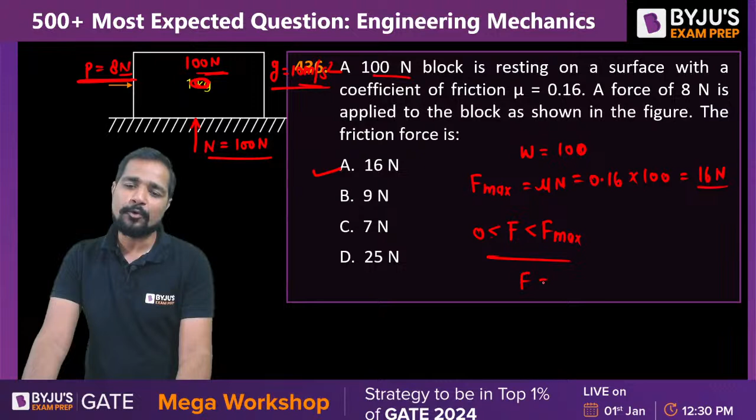That's why if the applied force is within the limiting value of the friction force, then we can write the applied force will be itself the numerical value of the friction force. So in this case, the friction force value will be written as 8 Newton.

Where is it? It is not mentioned. Okay sorry, the answer will be equal to 8 Newton. This was given by mistake. It is written 7, but C for Chennai will be the correct answer, that is 8 Newton. Clear to all?

16 Newton is not a correct answer. 9 is not a correct answer. 25 is not a correct answer. 8 Newton you can write in E option also. That is 8 Newton, my dear, is the answer. You can leave it as a 7. 8 will be the correct answer. Good.

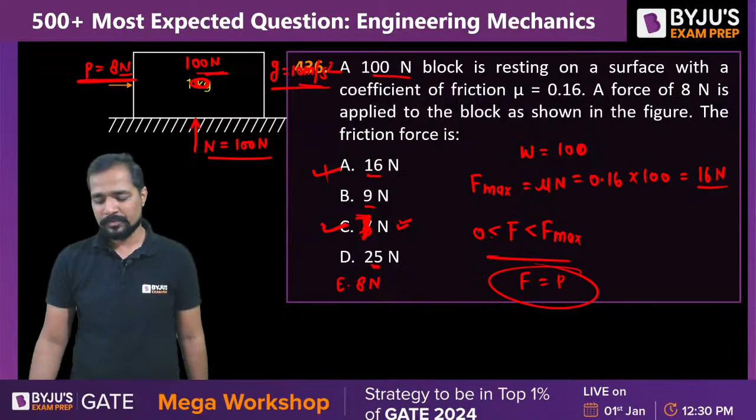Let's move forward for this question. A bullet enters a plank of 30 mm thickness with the velocity of 10 meter per second and leaves with the velocity of 5 meter per second. Find the minimum thickness of the plank so that the bullet remains embedded in the plank.

If I draw the question, then the question is somewhere like this. There is a plank which has the thickness of 30 mm, and a bullet is entering with the velocity of 10 meter per second, and it is leaving the plank with 5 meter per second. Clear? Then what should be the thickness of this plank? Definitely more than 30, so that this bullet will be embedded in itself.

It means the outside velocity must be 0 in this case, my dear, where the inside or inlet velocity is 10 meter per second. This is the question. Let me write the distance or the thickness right now as S. Yes, try to solve this question. Very important question is there. Then what will be this numerical value of S so that you will get the proper value?

Can you tell me the answer? Yes, you take 1 minute to solve this question. It's a question related to 1 minute. Already till 435 questions were covered by Sir. I'm going to cover the questions from question number 35 or 36 to 70, my dear. No, 65, 30 questions we are going to take.

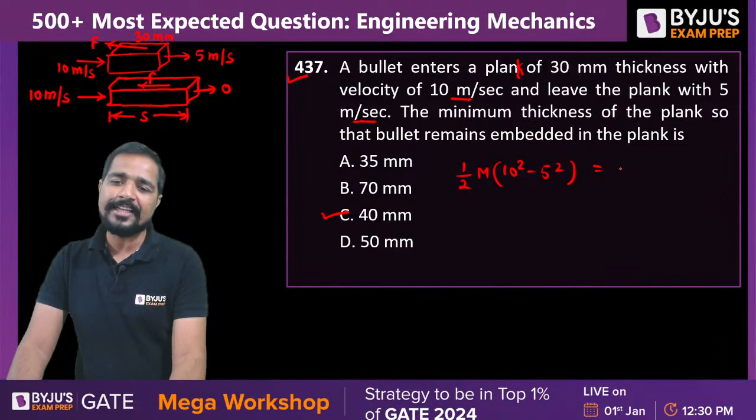C is the answer. Let's see how we are going to solve, sir. If this velocity or the kinetic energy is going to change, then definitely one friction force is acting in this case, one resisting force is acting. Then the same resisting force is going to act in this case too. And if I apply the work-kinetic energy theorem, then the change in kinetic energy is equal to work done, meaning 1/2 mass times 10 square minus 5 square, the change of kinetic energy, is equal to friction force multiplied by 30.

Similarly, my dear, the change of kinetic energy in the second case, minus 0, will be equal to F into S, my dear. If I divide equation 2 by 1, then we get 100 divided by 100 minus 25 will be equal to, my dear, what will be the answer? S divided by 30. Is it or not? From here, if I solve this equation, then S will be 40 as the correct answer, my dear. This is the work-kinetic energy theorem.

10 to 11 of you are here, my dear, but hardly 1 or 2 are writing the answer. Sir, sit with rough notes and calculator, try to write all the answers, otherwise the side person will give the answer later too. It should not be that even in the GATE exam you just write a serious answer. Okay, C is the correct answer.

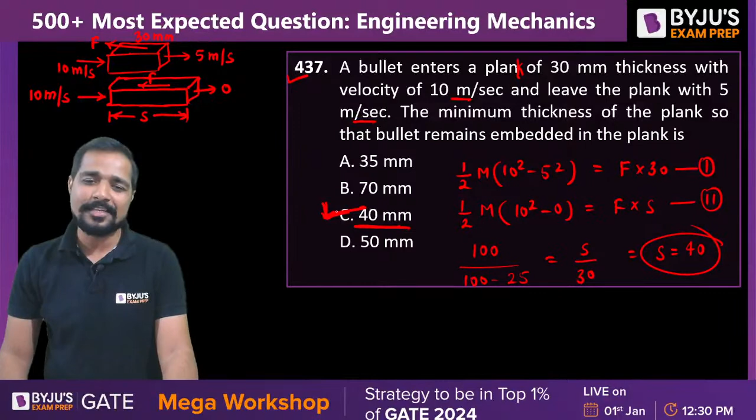I hope you are going to solve the next question too. Question number 3, 438. In this 500 series we are going to discuss it. Our aim is to solve the 500 questions.

One more question is in front of you, in which you need to find: a wheel of diameter 4 meter rolls without slipping, with the center velocity of 6 meter per second, and acceleration of 2 meter per second square, as shown in the figure. What is the velocity at this point C, my dear? At this point, what will be the velocity? This is the question.

There are two important methods to calculate the value of the velocity.

One is the I-center method and second is the relative velocity method, my dear. Whatever you want to follow, you will get the answer from both of the methods.

Sir, in this case, if I write the center point as O, then velocity of the center point O is given to us as 6 meter per second, where this radius is 2 meter, my dear. This is the question.

What will be the velocity at C? You need to find. So again, you can solve with the I-center method. If I'll solve with the I-center method, my dear, then definitely this will be the I-center. Then the complete body can be assumed to be rotated about this I point with omega.

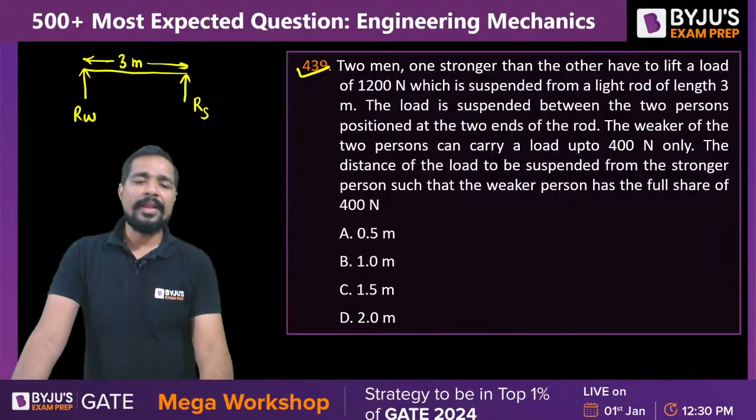Weaker can carry only 400 of load. Definitely stronger will take 800 of load. Then at which particular location you have to place that load so that it will be distributed accordingly, my dear. This is 1200 Newton. Let me write this value as x. This value is 3 minus x. So you need to calculate what should be the distance of the point of application of load from the stronger person so that the stronger can take 800 Newton and weaker can take 400 Newton.

Try to solve this question. What is the correct answer you all guys getting, my dear? Can you tell me the answer? What is the correct answer you are getting, my dear?

It will be clearly mentioned that if I'll take this point as S and this point as W, weaker. So can we write taking the moment about S? Very good, taking the moment about S. Let's see, are you getting the right answer or wrong? Then, my dear, can we write RW multiply by 3 minus W multiply by X must be equal to 0. What is RW? 400 multiply by 3 minus W 1200 multiply by X is equal to 0. What will be the value of X?

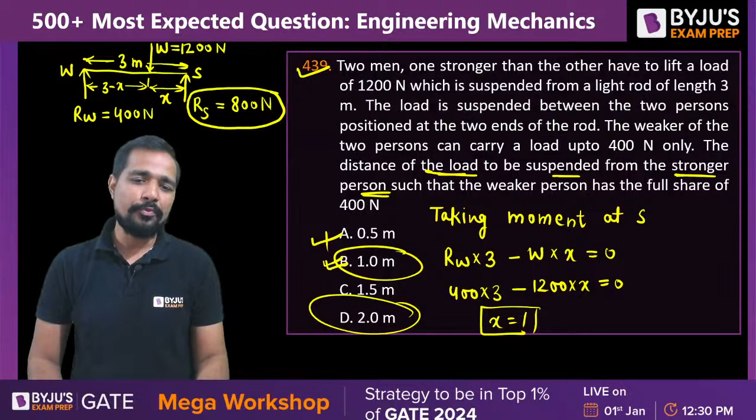From the calculation we are getting B for Bombay is the correct answer. This is absolutely right answer. Is this point clear to you? Good. B for Bombay is the correct answer for this question. Let's move forward.

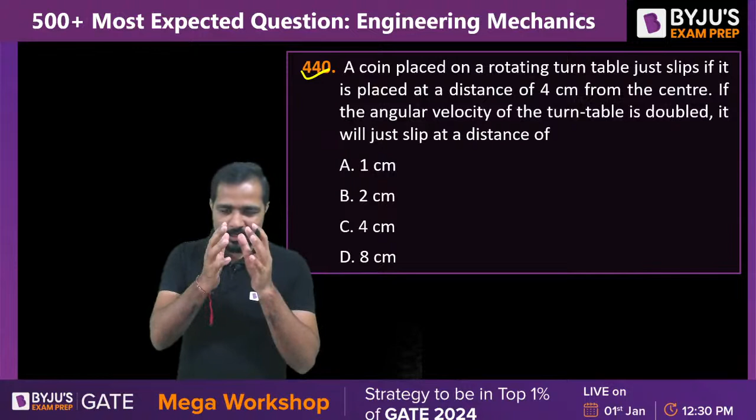Very important question. There is a round table, my dear, that is the turntable. I think this type of game you have just seen on YouTube, where a lot of persons sit on a round table and it starts to rotate, and due to the centrifugal force they all start to move in the outward direction.

Turning table, there is a game you can see on YouTube, but again you are not having so much time that you will go and check on YouTube, my dear. It will be better to invest more time on your questions. Yes, tell me the answer. Sir, there is a turning table. This one is a turning table.

Like this. Okay, now the body is rotating with omega. Then there is a distance of 4 centimeters from the center, at which your coin will slip, my dear. Coin exactly slips in the outward direction.

When this omega will be doubled, at which distance will this coin slip? I mean, will this 4 centimeter be more than sufficient so that it slips at the same location when I double the speed, or will it be near the center, or far away from the center? So this is a simple question.

When it is rotating with omega, then 4 centimeter is the distance at which your coin slips toward the outward direction or towards the outside. When you rotate your round table with double speed, then what should be the distance at which you want to put that coin so that it again starts to slip?

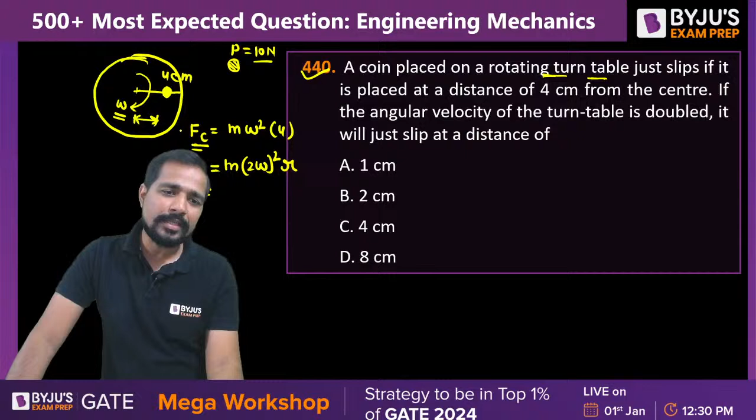That is r. So can we say simply that if you want to slip the coin, then your required force must be the same? If at 10 Newton it is going to slip, my dear, then definitely if you double the speed, it will also slip at 10 Newton. Now where the 10 Newton will be developed, that is the big question.

So when the omega was the original speed, at 4 centimeters 10 Newton was developing. When the speed becomes 2 omega, what is the r you need to calculate? Are you not feeling that when it doubles, it will be reduced by 4 times? What is the answer? When omega is doubled, the same force will be produced at 1/4 of the distance.

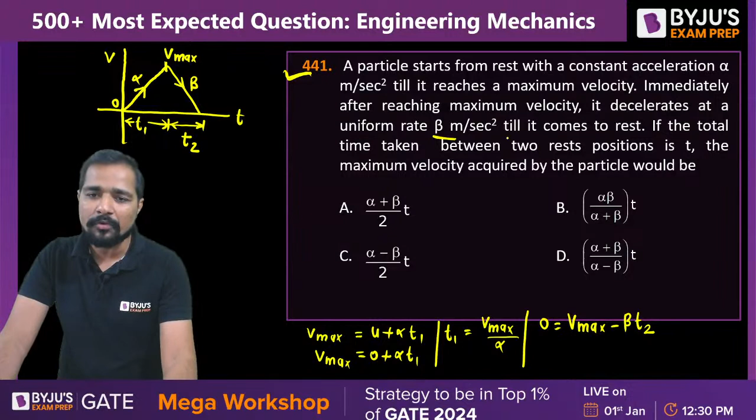Similarly, when it is retarding, the final velocity becomes 0, and initial velocity is Vmax minus beta t2. Why minus? Because it's an example of retardation. So t2 will be equal to Vmax divided by beta. T1 is clearly known to us, t2 is clearly known to us.

After that, if the total time, meaning t1 plus t2 taken between the two rest positions, is T, capital T or small t, then what will be the maximum velocity acquired by the particle? So can we take t1 plus t2 is equal to T? Can we write from here, Vmax by alpha plus Vmax by beta will be equal to T?

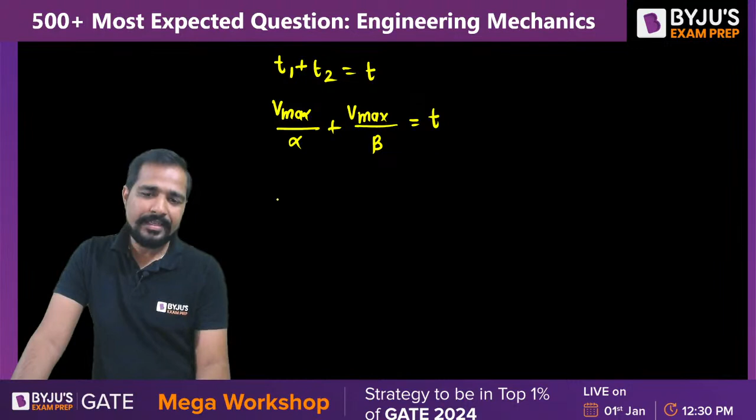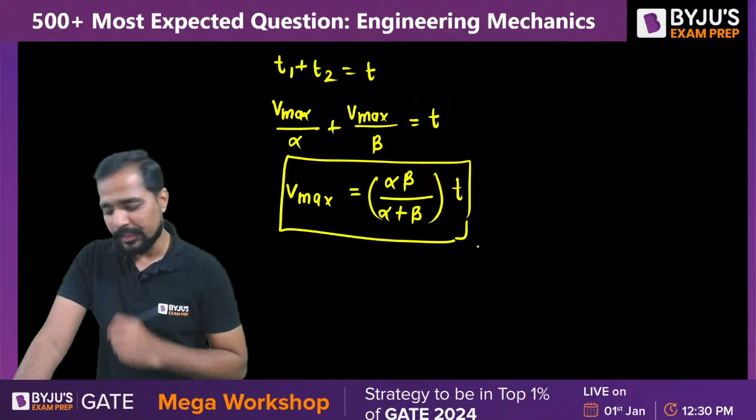Or can we write the value of maximum velocity? That will be equal to alpha beta divided by alpha plus beta, into T. Is it clear to all? Is this point clear to all? Alpha beta divided by alpha plus beta is the answer.

What is the answer? Bombay, not Delhi. Seriously, D is not the correct answer. Bombay, B for Bombay, is the correct answer. That is the reason in the starting I told you, don't write the answer in a hurry. Clearly read each and every statement of the question, then try to solve it.

Okay, let's move forward. Try to find the next question, a very easy question for you. In a frictionless pulley system as shown in the figure, each pulley having a weight of 40 Newton, then what is the value of W that can be lifted by the system under the given conditions?

Answer is already given. Answer Bombay. Vmax will be equal to alpha beta divided by alpha plus beta into T. Yes, it is clearly the answer. Clear or not? Bombay.

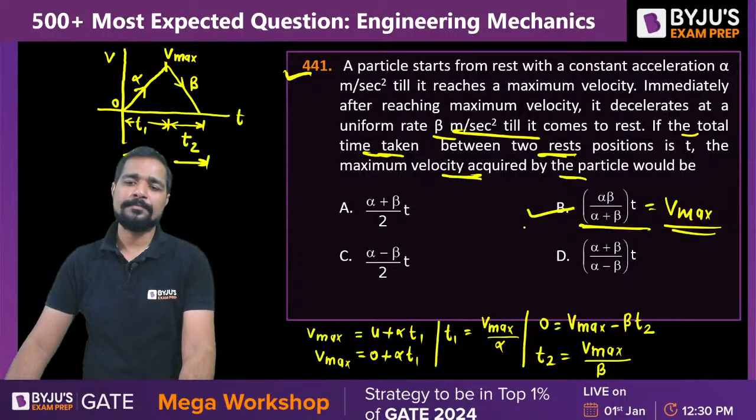Next. In the frictionless pulley system shown in the figure, if the pulley weight is 40 Newton, then what will be the value of W in this case? Please tell me the answer. What is the value of W in this case?

Sir, here you need to draw a lot of free body diagrams, at least 3 free body diagrams. If you are able to draw the free body diagram, you can very easily solve the entire problem.

Yes, write down the correct answer of this question. The question is a little bit tricky, but whenever you use the free body diagram concept and the equilibrium condition, you will easily be able to give me the answer of this question. Let's see how many of you are getting the correct answer.

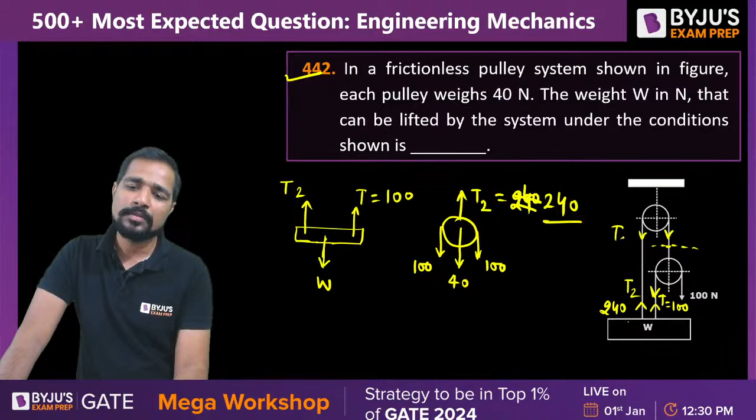So if we draw the free body diagram of this block, very good Raghuram, absolutely right answer. If we draw the free body diagram, then this is the W, my dear. In this way, there is one tension equal to 100, and in this case there is one more tension that is T2. T2, T2, and this is also T2, which is equal to 240. So the weight will be equal to 340.

Maximum of you are very much late. Answer is absolutely right, 340. Your competitors are waiting, bring the answer with a good rank. So answer is absolutely right, 340 is the correct answer in this case, my dear. Yes, Shivenji and Raghu, absolutely right.

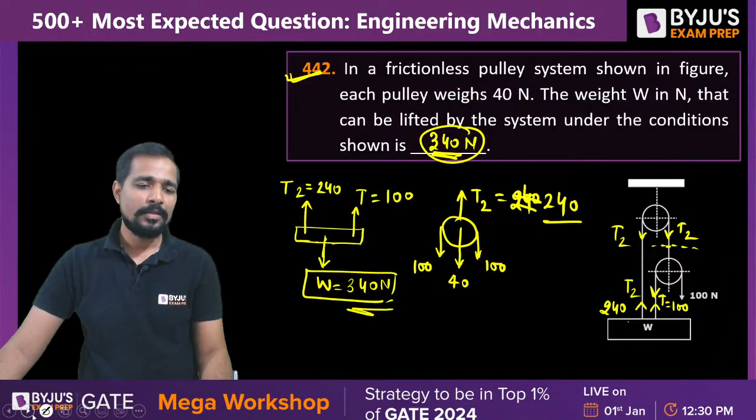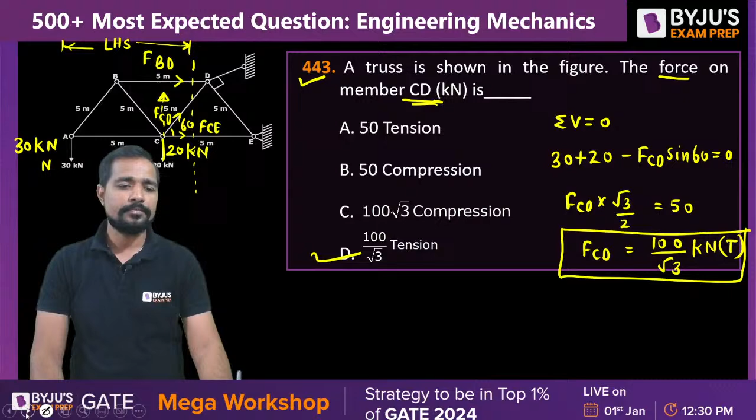Let's see how many of you are getting the correct answer of this question, my dear.

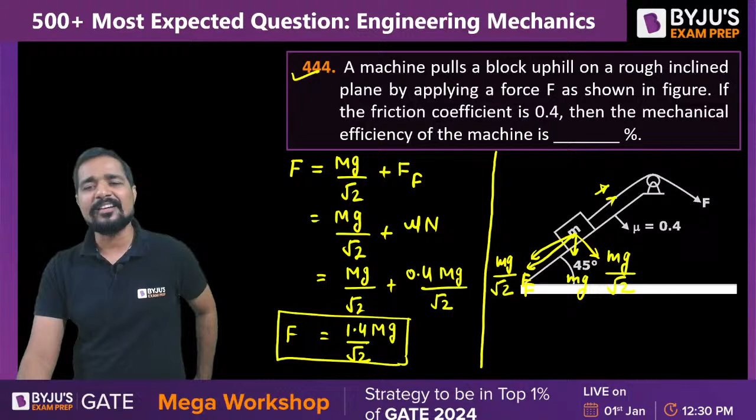This force is required to pull the entire body on the inclined surface. Kiran, Shreyas, is this point clear? This amount of force will be required to pull the body in this particular direction. Very good, Captain Jack Sparrow. Let's see, I don't think this much efficiency is coming. It may be your calculation mistake.

Now, after that, sir, what is the efficiency? The efficiency will be equal to output work by input work. Output means mg by root 2 is displaced by x.

How much work do you need to do? That is F multiplied by x, because the same force you need to apply now. So in this case, x and x will get cancelled. So mg by root 2 divided by 1.4 mg by root 2. So the efficiency will be equal to 1 divided by 1.4 into 100. 71.7 is the correct answer of this question.

Sir, I am a third year student preparing for GATE 23 and also GATE 24. I've covered aptitude, heat transfer, thermodynamics. Now I want to take FM, but lots of my seniors suggest covering maths.

Yes, exactly. Even if you have not covered maths till now, I'll suggest, if you don't have any other option, then go with maths and production if you can prepare right now. And if you are preparing for XE, then with thermo, go with strength of material. That will be good for you right now, because FM will hardly be covered.

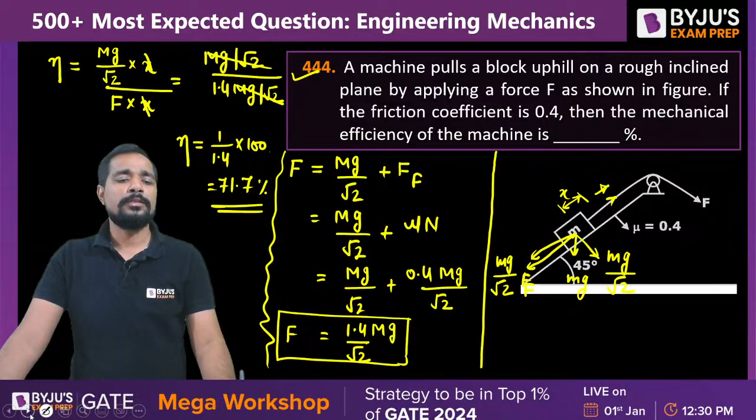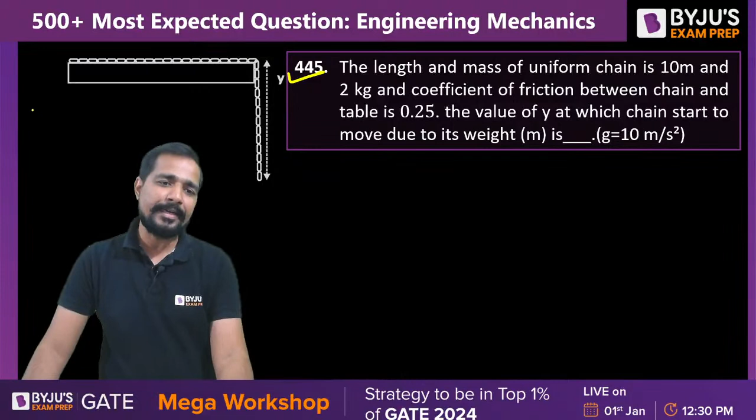Good, next very important question. The length and mass of the uniform chain is 10 meter and 2 kg. The coefficient of friction between chain and table is 0.25. Find the value of y at which chain starts to move due to its own weight. G you can take as 10 meter per second square, meaning acceleration due to gravity. Total length is given to us, let me write the total length, it will be L.

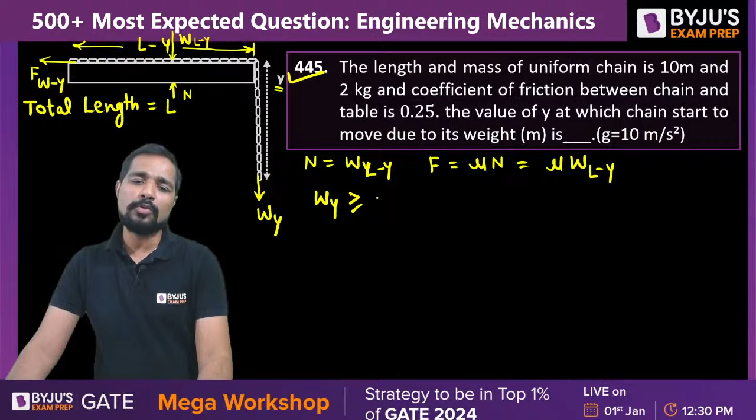Now what should be this value of y so that this body will start to move in the downward direction? If it is y, can we write this as L minus y? Is it or not? So this bit of the y portion is resisted by the friction force on the L minus Y portion, and this is the total weight W. This is the normal reaction of this portion. Can we write normal reaction will be equal to W(L minus Y)/L, and friction force will be equal to mu into N. When your applied force is greater than or equal to friction force, then your body will start to move automatically, that's when your body will fully start moving.

What is the weight of Y? Total weight is W, what is the weight per unit length? W by L. Then what is the weight of Y? This is Y. What is the friction force? Mu times WL, where W is per unit length multiplied by L minus Y, giving mu times W by L times (L minus Y). If I solve it, W by L and W by L will be cancelled out. Then Y must be equal to mu(L minus Y). So Y must be equal to or greater than mu L divided by (1 plus mu). Mu is 0.25 divided by 1.25 multiplied by 10. Answer is 2 meter. That will be the length at which your chain will start to move directly in the downward direction, because the weight of the hanging part will overcome the friction between the table and the chain.

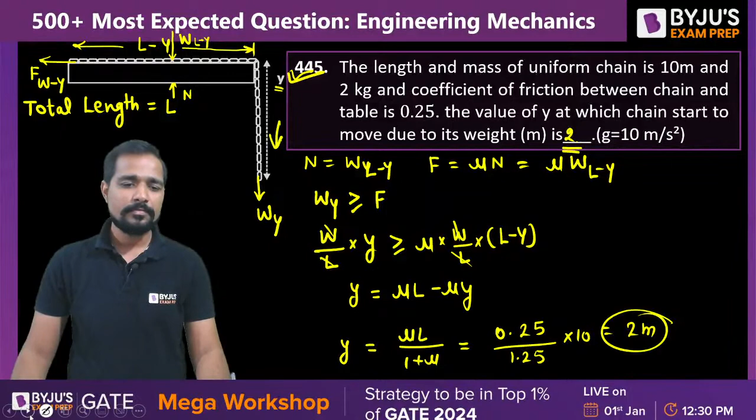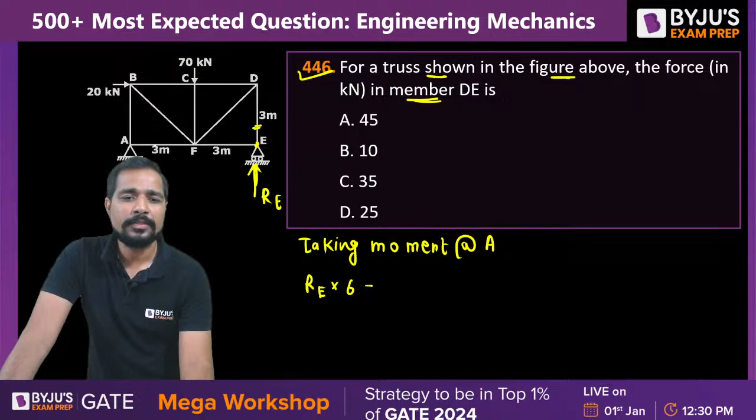RE you need to find, na? Taking the moment at which point, my dear? At point A. Can we take the moment RE? Okay. Multiply by 6, minus 70 multiply by 3, minus 20 multiply by 3, is equal to 0. RE will be equal to 210 plus 60 divided by 6, my dear. 210 plus 60, that will be equal to 270 divided by 6, it will be equal to 45.

RE is also equal to FDE, is equal to RE, that will be also equal to 45, my dear. Absolutely right answer, 45 is the correct answer. Did anyone get this answer? Any one of you?

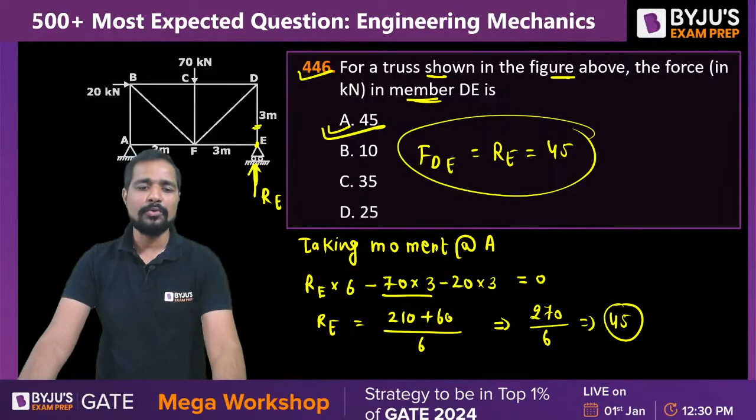Oh, sorry. Next question - Matrix you should solve first of all, first topic. Matrix. Yes, vector algebra, one of the important topics.

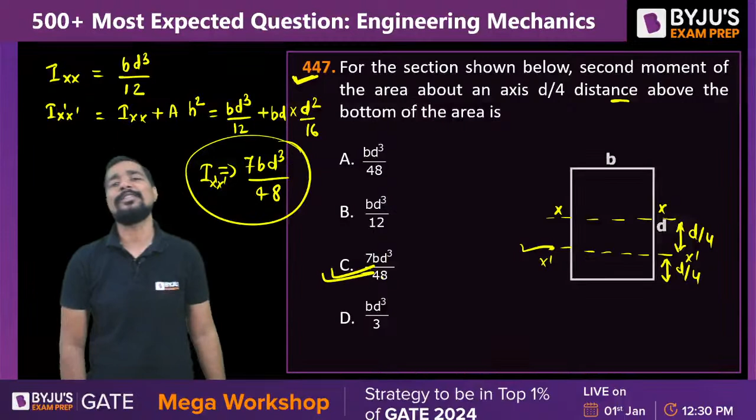4 means 16, so what is the answer? The answer will be equal to 7 BD cube divided by 48. That is the area moment of inertia about this point. C is the correct answer, not A. Varun, A is not the correct answer - C will be the correct answer for you guys.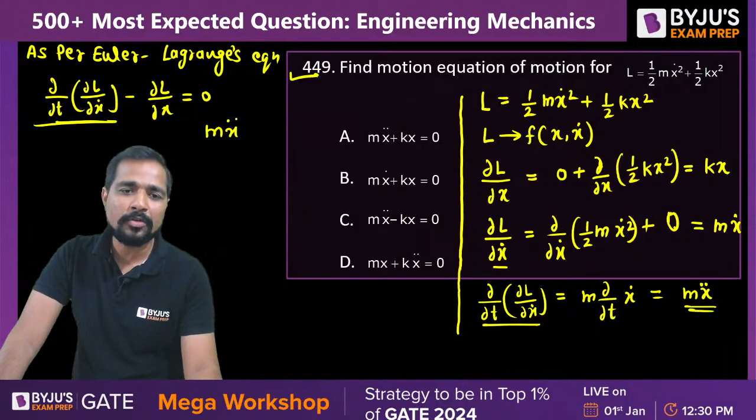What is dl over dx dot? Sir, m into x double dot minus kx is equal to 0. This is the equation of motion. This one is the equation of motion. What is the correct answer? Mx double dot minus kx is the correct answer. C for Chennai is the correct answer, Varun and Sirius. Yes, C for Chennai will be the correct answer of this question, my dear.

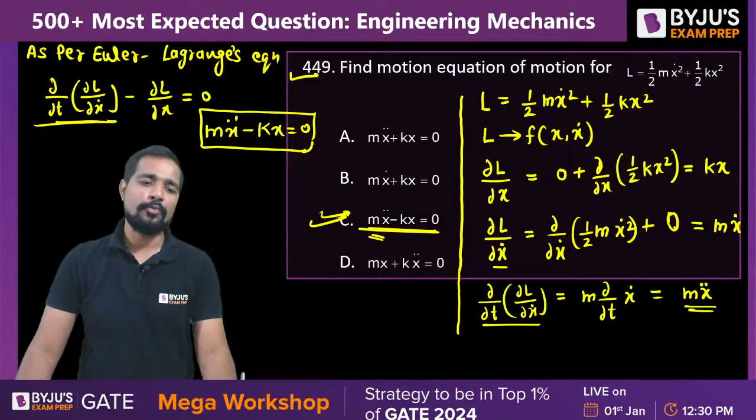Yes, question 449, the last question of today's session. I am going to share this. Very important question for you. Angular velocity you need to calculate, my dear. Very important question for you. Let's see what is the question.

Sir, P is equal to T plus 10 Newton force is applied. This is 0.4 meter, this is 0.75 meter. A 100 kg spool shown in the figure has the radius of gyration K given to us. A cable is wrapped around the center hub of the spool and a horizontal force of variable magnitude F is equal to T plus 10 Newton is applied, where T is in seconds. When the spool is rolling without slipping about point A, and the initial angular velocity of the spool is 0, find the angular velocity after 5 seconds.

It means you need to find alpha. When the body is subjected under the force P, that will apply torque, and if it is applying torque, you will be eligible to apply Newton's Second Law for rotation. So apply NSL of rotation, my dear. NSL of rotation.

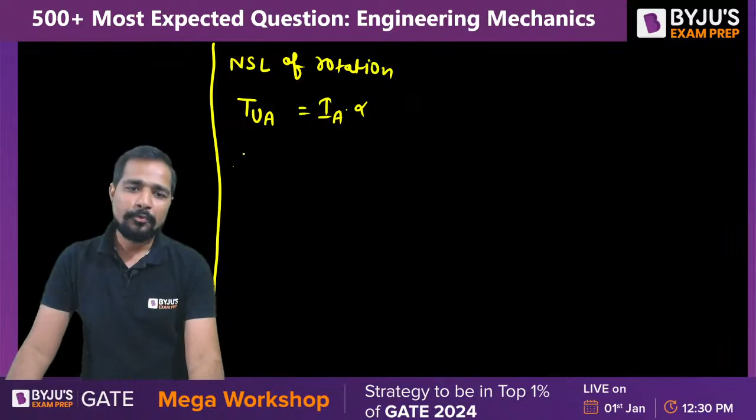What is it? Unbalanced torque about A will be equal to IA into alpha. Unbalanced torque, force is applied, multiply by the perpendicular length: 0.75 plus 0.4, that is 1.15.

What is I? Mk square, that is at Cg, plus Mr square, because you have to shift at A, now that's why it is alpha. What is the mass? 100 kg. K is 0.35. So F 10 plus of...

T is the force into 1.15 plus mass 100, into 0.35 square plus 0.75 square into alpha. Can you get the value of alpha from here?

1.15, 10 plus T, into how much? 100 into 0.35 square plus 0.75 square.

What answer are you all getting? Can you tell me the correct answer of this question? 0.35 square plus 0.75 square multiply by 100, divided by 1.15. What can we write? 59.56. Answer we are getting: 10 plus T divided by 59.56.

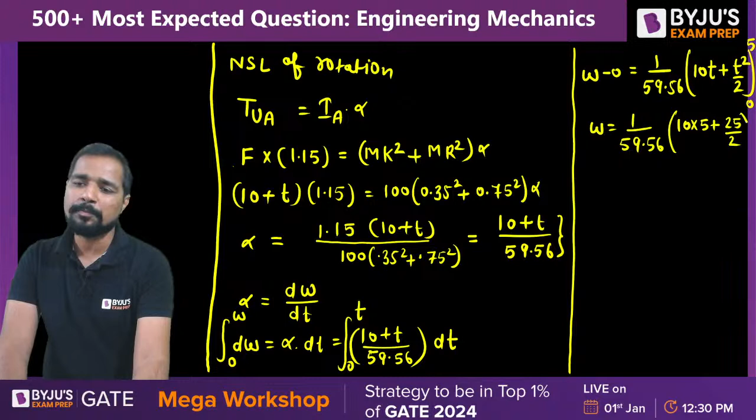Omega will be equal to 1 divided by 59.56 multiply by 10T. How much is the upper limit? 5, lower limit 0. So it will be 10 into 5 plus 25 by 2. Can you please tell me the answer?

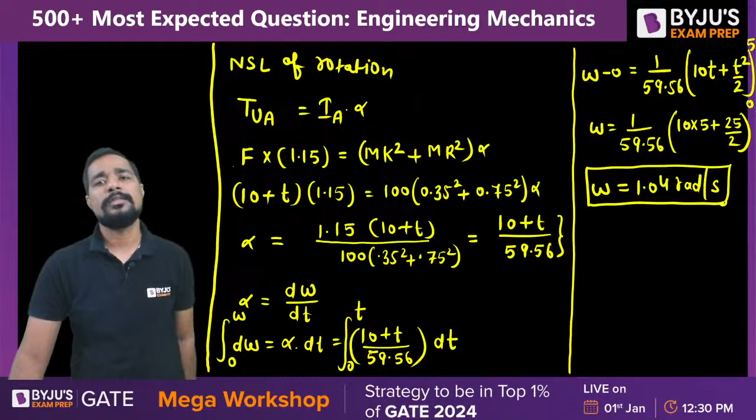That is 50 plus 12.5 multiply by answer 1.04. Omega we are getting 1.04 radian per second. Tell me, are you getting the same answer or not? After 5 seconds, the angular velocity of this spool will be equal to 1.04 or 1.05 as the correct answer. Yes, absolutely right.

After 5 seconds, the spool will have the angular velocity like this, that is 1.05 radian per second is the velocity. I hope maximum of you have given the correct answer of these 15 questions.

The other 15 questions I am going to give you as homework. Definitely you need to solve them. Don't enjoy too much at New Year because you have the exam after 20-30 days.

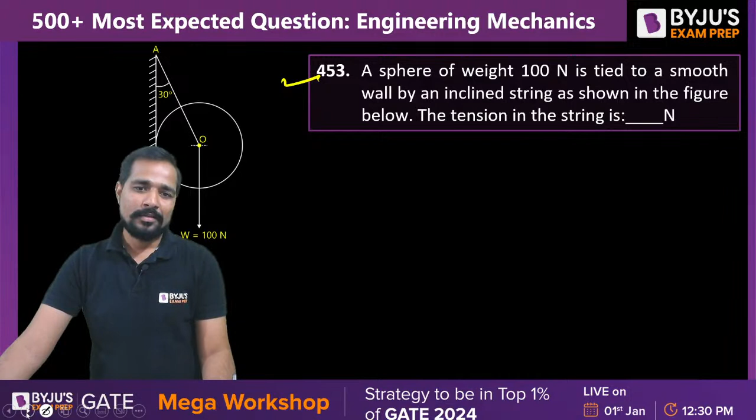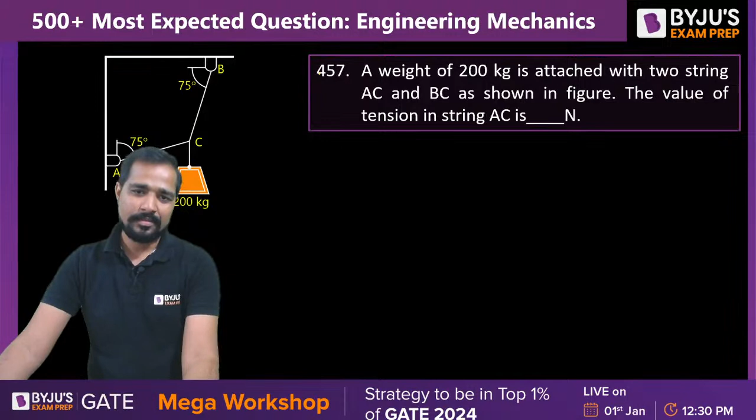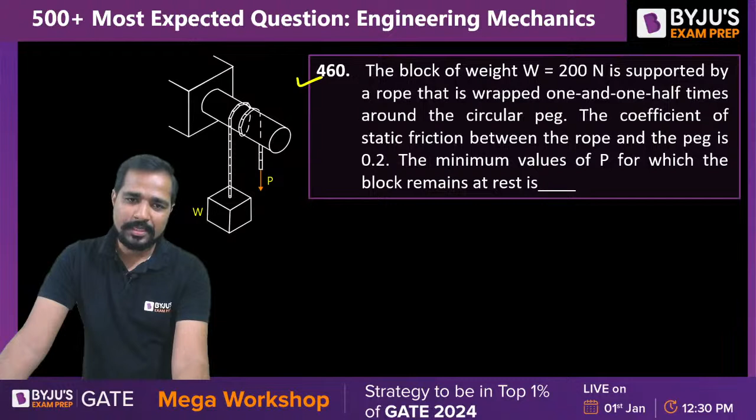I just move sideways so that you can check all the dimensions clearly. If you want to take a screenshot, you can take it. Okay, good.

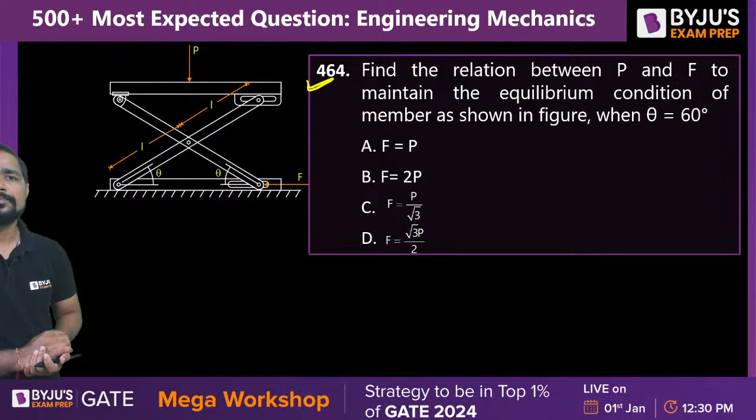So this is all about today's session that we have discussed. See you again in the next session.